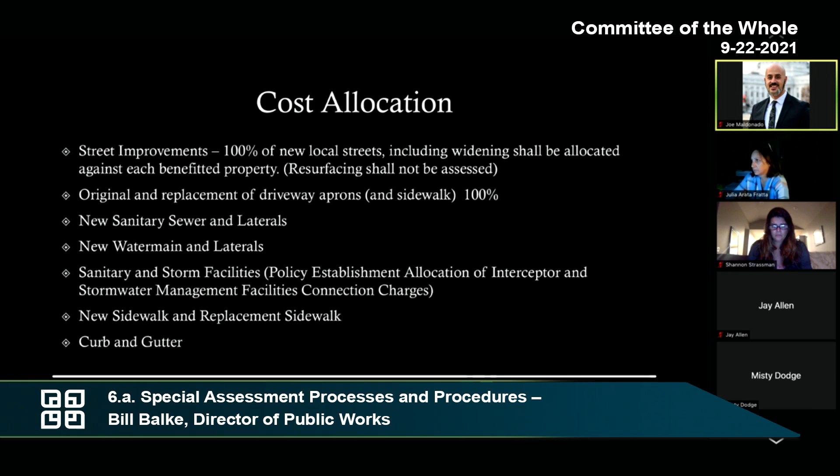Curb and gutter is another area that we would assess for, and it's all laid out in the policy. There's a lot of detail as to how much of the curb and gutter is assessed, the percentages, the length, et cetera.

A front foot method is typically what we would use for things like curb and gutter and sidewalk. You take the total project cost for those elements, divide it by the number of feet in the frontage for each property, and you get assessed a per-foot cost based upon the lot frontage you have in front of your lot.

As you can see, some lots are smaller than others, so it's not exactly equal. If you have a longer lot, it would be more equitable — instead of fair — that larger lots have a larger assessment.

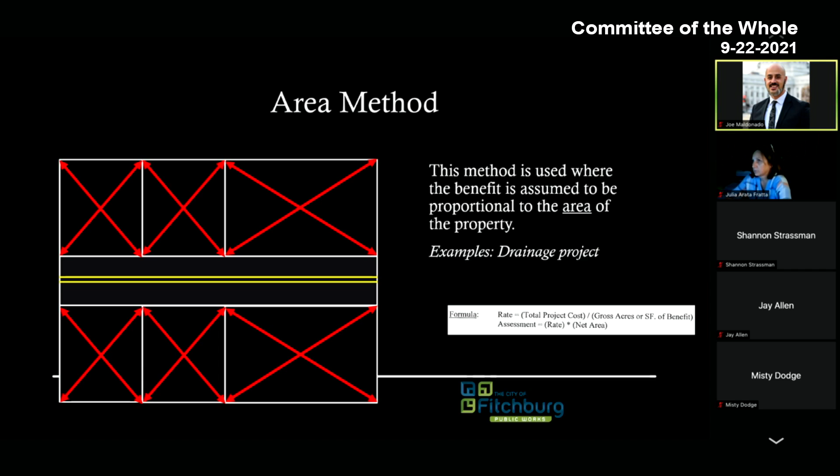Area methods are similar to the per-foot method. For instance, you take a lot area and divide the project cost by that area. We would use this for something like a drainage issue, where there's an area that drains into a specific development or stormwater project, and we divide that cost up by the area of contribution to the stormwater.

Lots or connection methods are similar to the area method, but everybody is assessed equally. It's the most fair of the methods, but smaller lots are paying just as much as the biggest lot that's there, and sometimes that's not always equitable. There's no good right way or wrong way to do this — it's how you look at it. If you have a tiny lot or a tiny frontage, you're paying just as much as somebody with a big frontage or a big lot.

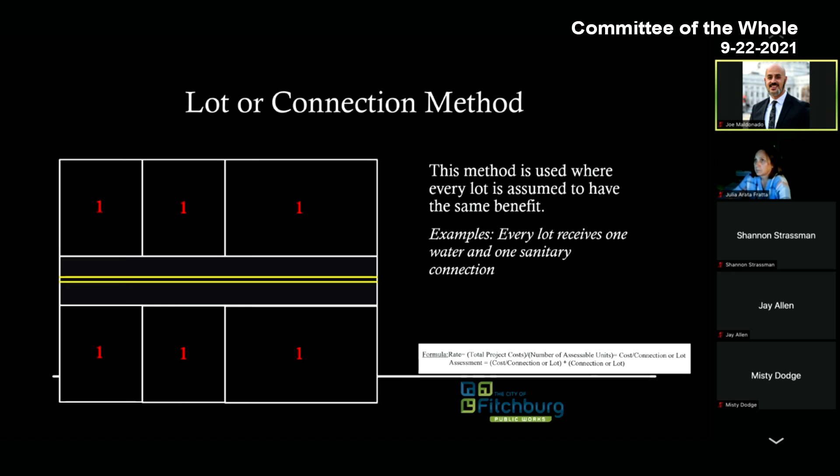Benefit zones are similar to the lot area method, where if we have a pond at the end of a street, everybody would be contributing their fair share based upon the areas that they have closer to that improvement.

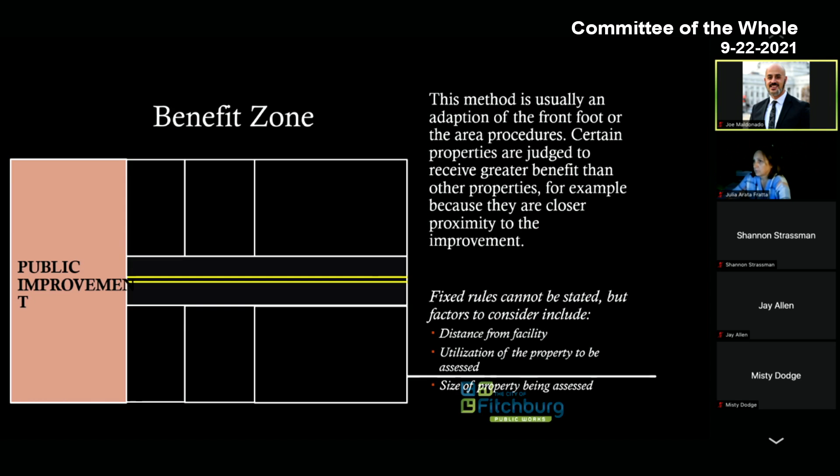In our assessment policy, we have preferred methods for assessments. For example, for curb and gutter, sidewalks, alleys, and storm sewer, we would want to use the per-foot or area method. There's a preference from most common to least common method that we use when we determine what kind of assessments to implement.

Communication outreach is something I wanted to touch on. We do try to get the project or special assessment notices out to properties anytime there's an assessment contemplated within the 10-year capital improvement plan.

For instance, if we know 7, 8, or 9 years out we're going to be installing a water main on a project, and part of the benefit is recovered by special assessments, they'll get a notice -- essentially a letter saying we've got a project in the capital improvement plan and there's a pending assessment for it. They're invited to come to the public hearing for the capital improvement plan and speak their mind.

I think that's something we can probably do better outreach on, just to explain the projects a little better so people have an understanding of what an assessment is. Maybe some more information in that CIP process to make sure people understand what the project is and why it's needed. It'll just involve a little more staff time up front to make sure we have letters explaining the key points of what's coming and why it's important.

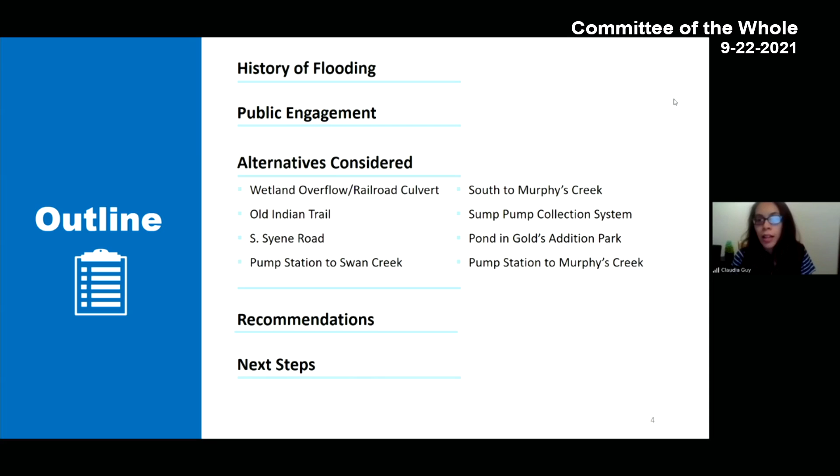Just a quick outline of what we're going to be talking about today. We're going to start with a history of flooding in this neighborhood. We're going to talk about public engagement and input that we've received from the public on this project. Then I'm going to turn it over to Anne Marie Kirsch to go over the alternatives that we considered, as well as the cost and benefits that we're expecting to see from those alternatives. And then we're going to move on to recommendations and next steps.

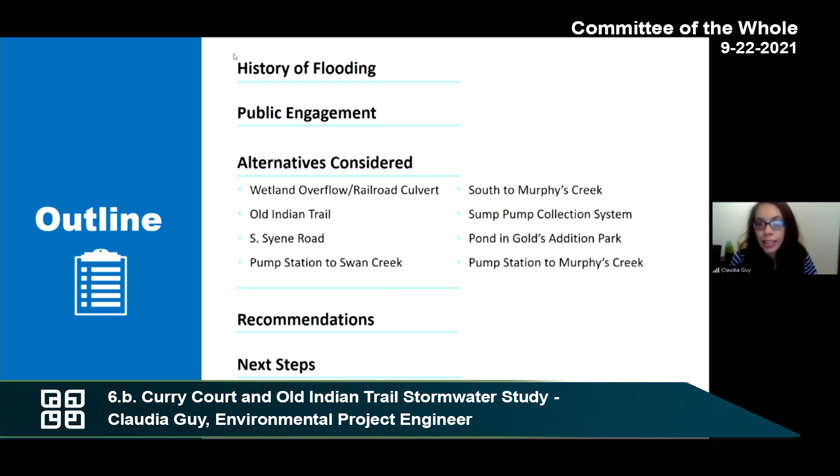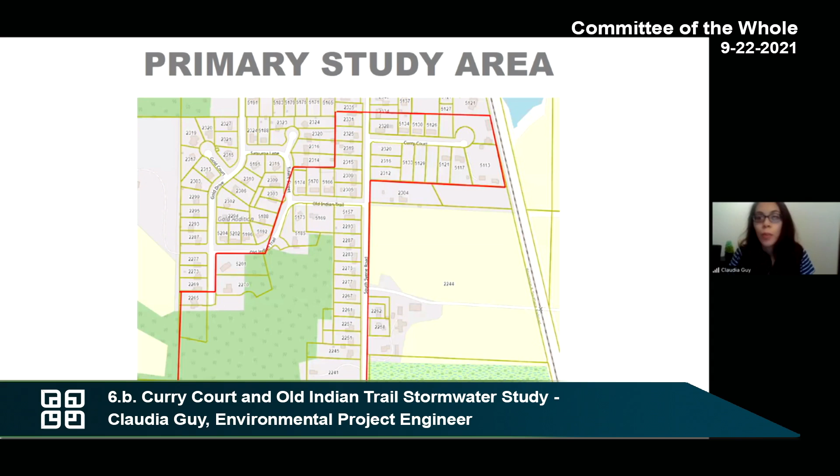So just to start with some history of the flooding in this area. The primary study area included Curry Court, which is on the east side of Fitchburg, south of Irish Lane, along South Syene Road there. So this included Curry Court and Old Indian Trail, as well as Gold's Addition Park. This was really the area that we were trying to understand what the current problems are and what could feasibly be done to improve the identified problems.

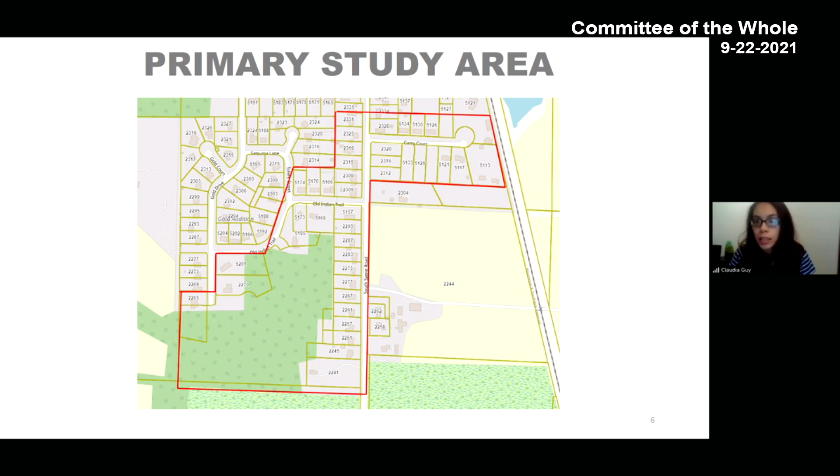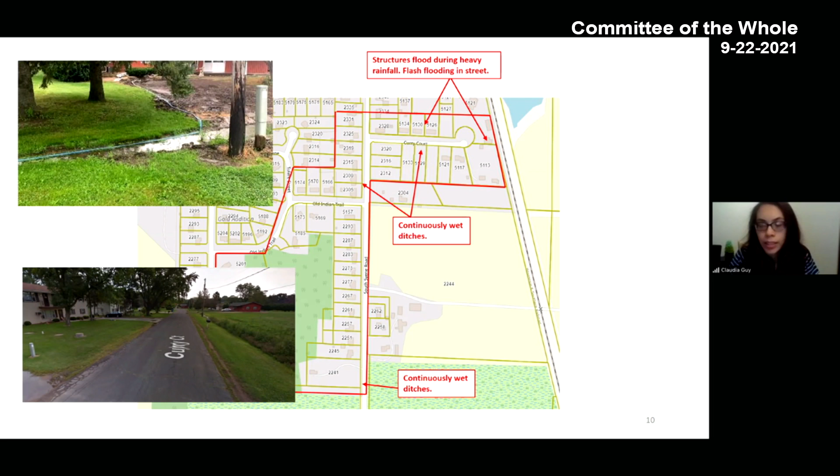Another thing that we heard is areas that have continuously wet ditches, and here are some photographs of what that looks like - just ditches that are constantly wet. In addition, there's a culvert that goes underneath Old Indian Trail, and it doesn't drain. So there's localized ponding on either end of the culvert, which historically drained to the south, but that drainage route has since been blocked off - it's just been filled in by previous owners who lived in that area.

And this is what that looks like. You can see that there is this kind of lime green color - that's actually water, and it's that color because there's algae. That is an indication that water has been standing there for a very long time. Typically, if you have water that goes to an area and then flows away pretty quickly, that water will look relatively clear, versus if it really is ponding there for a very long time, you will see algae like this start to form.

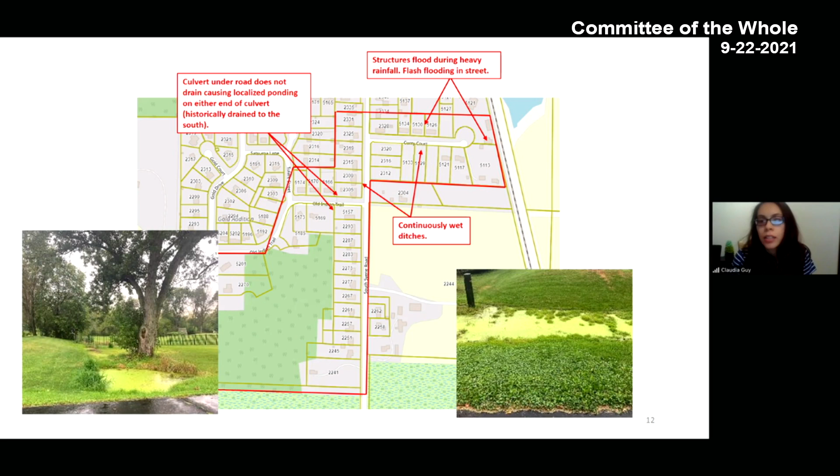Also, we heard one resident who was dealing with flooding in their backyard due to lack of positive drainage away from their yard. And flooding in the park as well due to flat ditches and areas, high groundwater, and also sedimentation within those ditches. It's become a problem.

This is an area that the park staff maintained in the past, but because it's so wet, it hasn't been possible to get mowers back there, at least for the last few years, because the mowers get stuck or would get stuck if we tried.

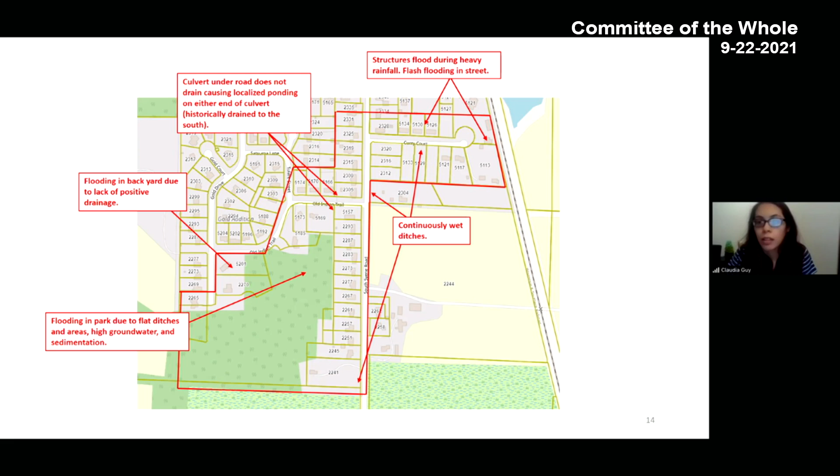And here's just a photograph of what that looks like. You can see the green algae again, indicating that this water really is ponding there and not moving very quickly.

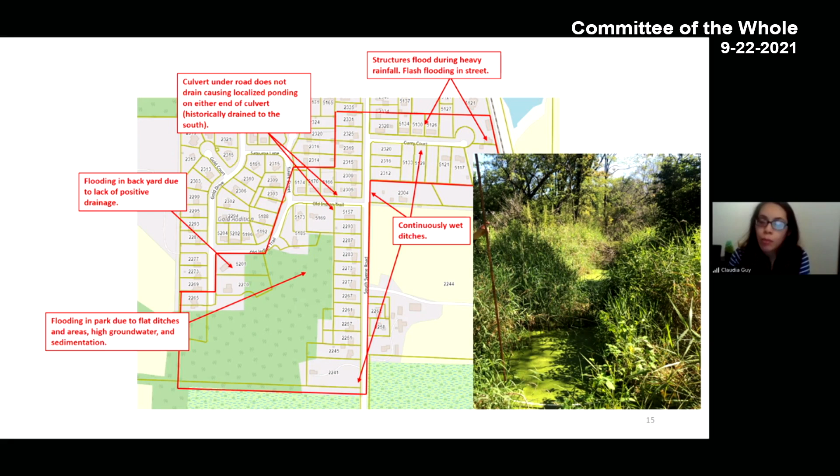So in terms of public engagement, we had a public information meeting earlier this year to introduce the project and to also solicit input regarding existing problems as well as input regarding potential solutions. We wanted to make sure that we had a clear understanding of all of the problems here, as well as asking residents to provide input on if they had ideas for solutions.

After that project, we proceeded to pick alternatives and then move forward with the analysis of those alternatives. And then we had public information meeting number 2 to review the study results with residents. The pumping station wasn't included at that time because that was a change order since then.

Based on that public information meeting, we heard a lot of negative feedback on the sump pump collection system alternative. So we sent another survey following that meeting to get additional input from residents who would be impacted by that, just to see if the people who came to the meeting were representative of the general consensus of the people who lived in that area.

Anne Marie will talk about the results of that in more detail later. And then of course, today we're coming to the committee of the whole to review the study results and solicit feedback on next steps.

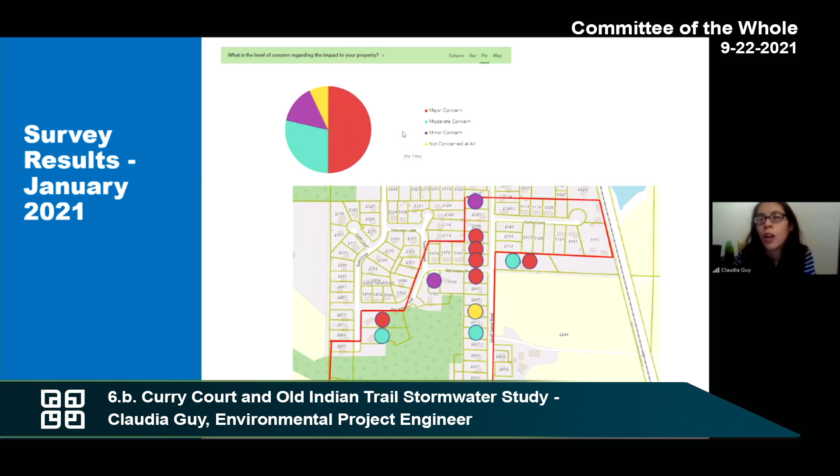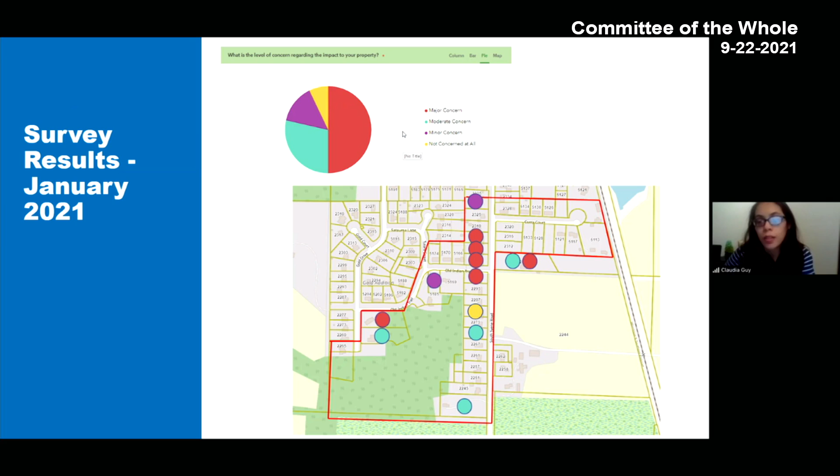About half said it was a major concern, a quarter said moderate, and the rest said minor or not at all. I thought it would be interesting to see where those people were located. One thing I noticed is that it seemed to correlate - the people who said they had a major concern seemed to be the folks who have sump pumps that run continuously. So at least in my mind, one of the biggest problems is sump pumps that run continuously, and you would presume soggy ditches that result from that.

We also asked folks for input on what they thought the best solution would be for flooding problems in the area. The most common response was that folks really didn't know or have insight into what might be a solution.

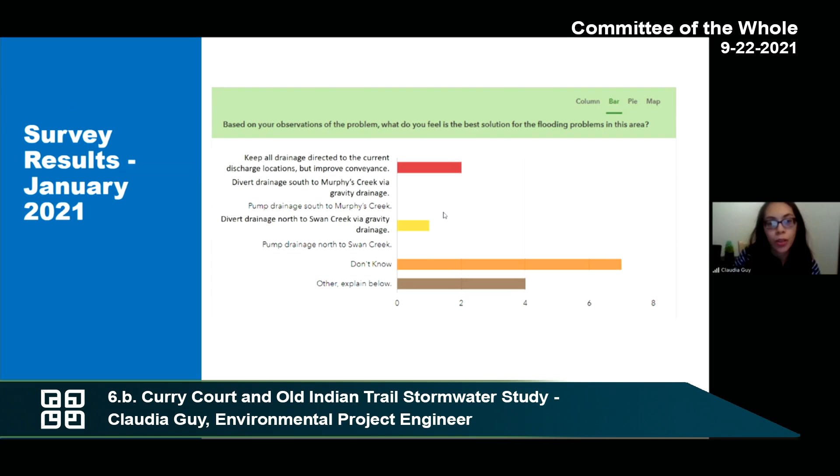2 people said keep all the drainage directed to the current locations, but improve conveyance. 1 person said divert drainage north to Swan Creek via gravity drainage. Then 4 people had additional responses: one said gravity drainage but they were unfamiliar with creeks, another said dredge ditching in the park to drain to the south from Old Indian Trail, hopefully alleviating some burden from Curry Court. Another said consider running sanitary sewer to the area, and another simply said not enough space to explain.

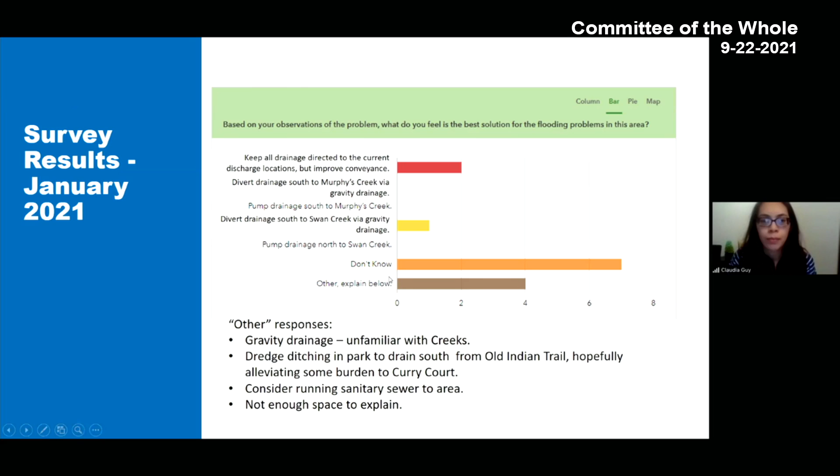In addition to sending out that survey, as part of public information meeting number 1, we asked people to feel free to reach out if they had more insights that they wanted to share. So we did receive input from residents via email, phone calls, and on-site meetings with residents throughout the neighborhood, if they reached out to us.

That input included ideas regarding gravity drainage along South Sayin Road, ideas regarding gravity drainage along the railroad corridor through Mark Jones's property, ideas regarding drainage through the park, and assistance reaching out to property owners east of the railroad tracks regarding potential ditch work.

We also had meetings and input from stakeholders who we may need easements from in order to implement some of these alternatives, to gauge their level of interest in working with the city for a potential easement. Those folks included the property owner south of Old Indian Trail, the property owner at the end of Curry Court, and the property owner east of the railroad tracks.

More recently, we sent out that sump pump collection survey, which again Ann-Marie will talk about in more detail later.

With that, I'm going to hand it over to Ann-Marie to discuss modeling, and I'll stop sharing my screen.

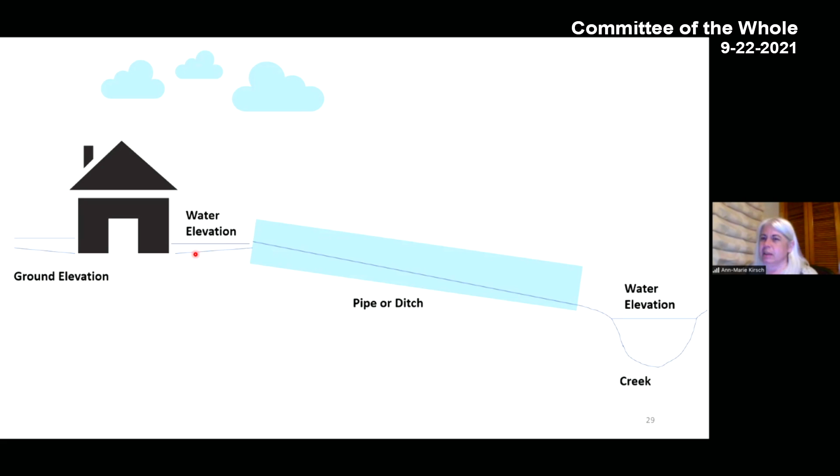In this area, we have a lot of homes with rural section roadways without curb and gutter or storm sewer, so all the water flows through ditches or culvert pipes. One issue is that where the homes are, the water tends to spread out because the topography is so flat. Unlike behind a roadway culvert or a dam or detention pond, we can't effectively stack that water up to get it through more quickly.

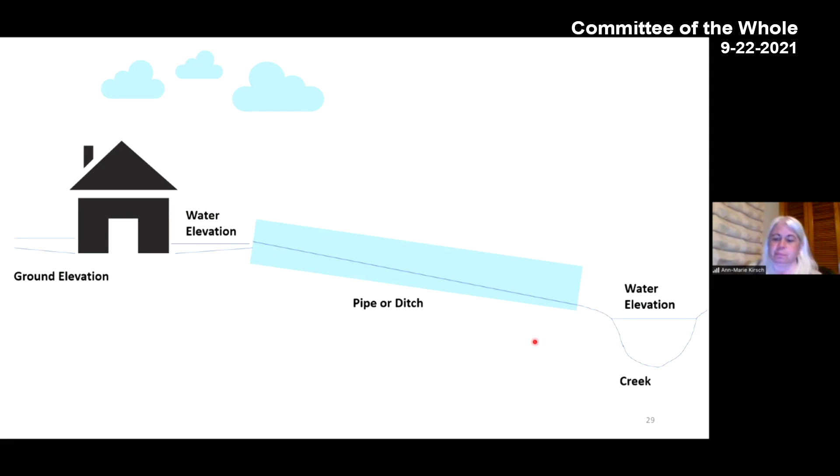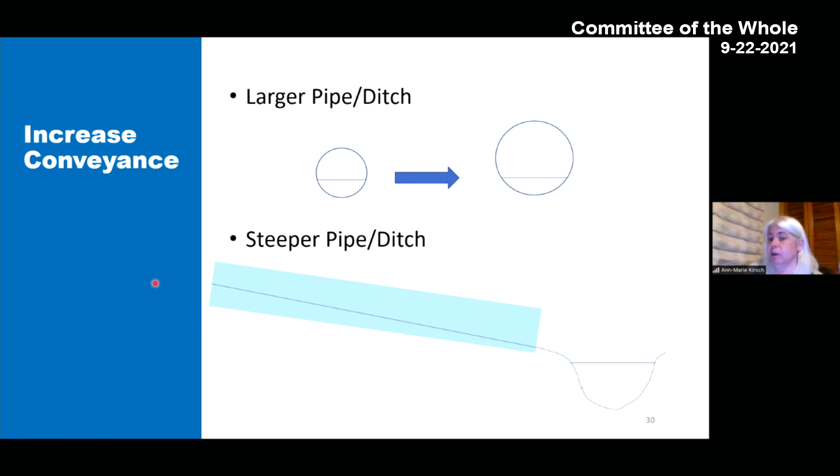We're also controlled by the creeks at the other end, either Swan Creek or Murphy's Creek, which are fixed locations we can't move. Sometimes people say, what can we do to increase the conveyance? Let's put in a larger pipe or ditch. But because we have such a limited ability to stack up the water, even a bigger pipe won't get a lot more water through. We'd also think about a steeper pipe or ditch, but the grades are really limited. We can't dig down lower because of the creeks at one end, and we can't raise the houses at the other end because those are fixed elevations.

We also hear a lot about detention ponds, and we see them all over the city, especially with newer development. The thought behind a pond is you've got water running off the watershed. In agricultural or natural conditions, there's not as much water running off, and it just flows naturally downstream, maybe to a creek or a lake. Before development, everything runs at its natural rate.

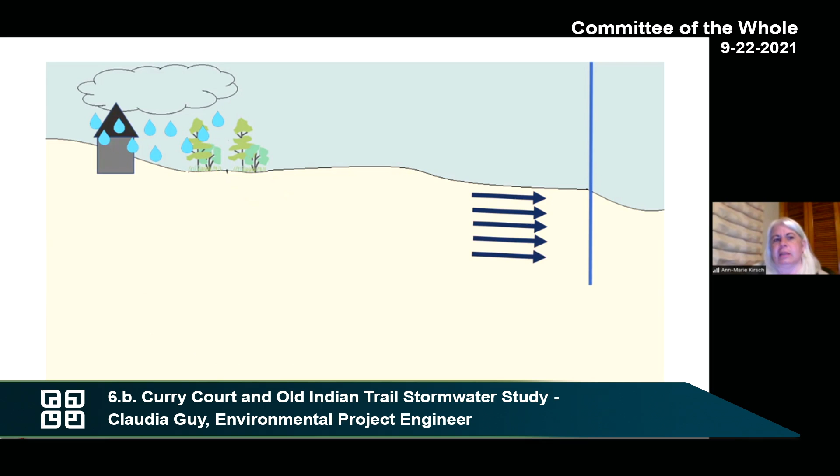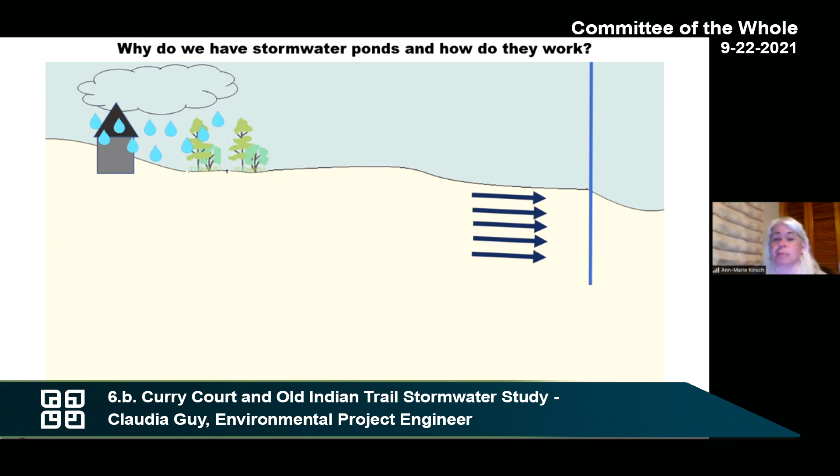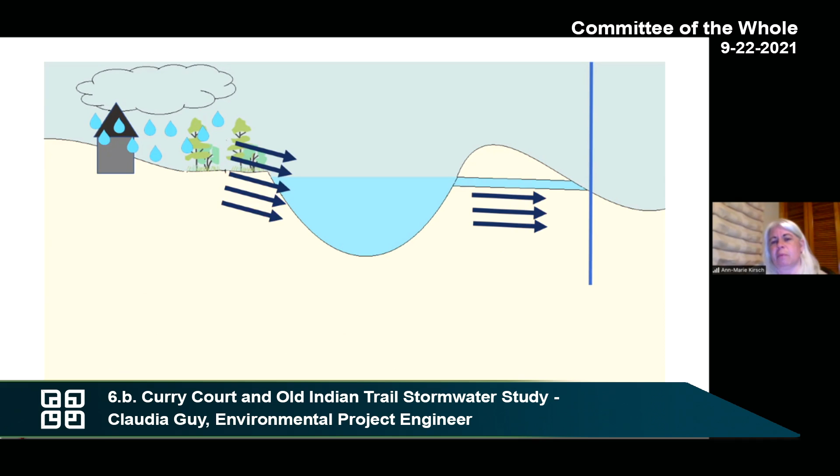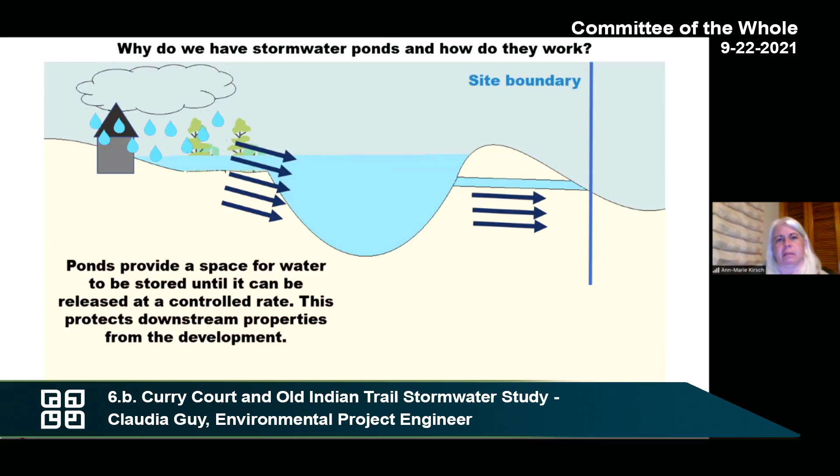The average ditch slope is around 0.6%, which is very flat — 0.5% is really the flattest we would ever choose to design something. Some areas are slightly flatter and some slightly steeper than that average.

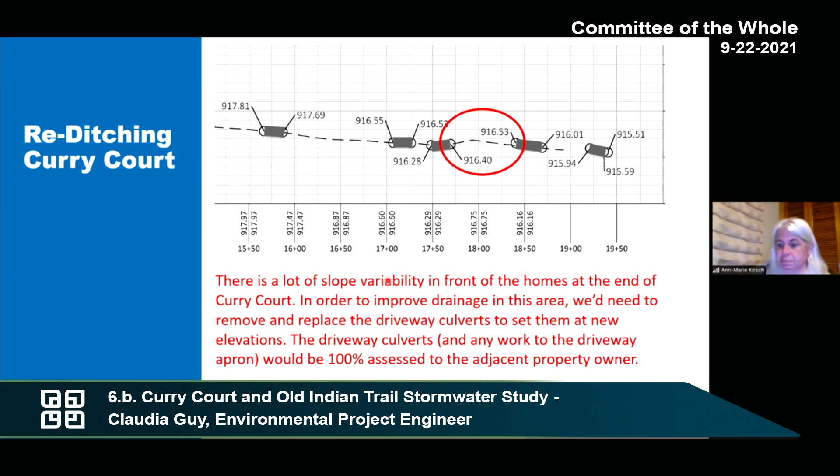Bill was just talking about assessments earlier in the day, and because this is a benefit to the property owners, the driveway culvert replacements or resetting would likely be assessed 100% to the adjacent property owners. Because the ditch itself is within the city right of way, the city would have responsibility for maintenance in terms of potential future dredging or sediment removal, but the property owner would be responsible for the driveway culvert itself.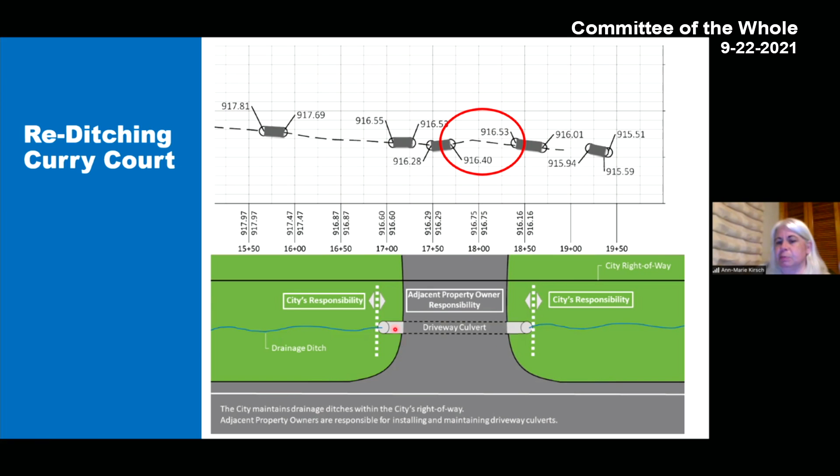So this would provide marginal improvements, more for everyday events or the sump pump collection, keeping the water moving rather than pooling in low-lying areas. This area sees a lot of water from sump pump discharge, so it's still going to see a supply of water that can impact the ditches and keep them wet, especially with poor drainage conditions in the soils.

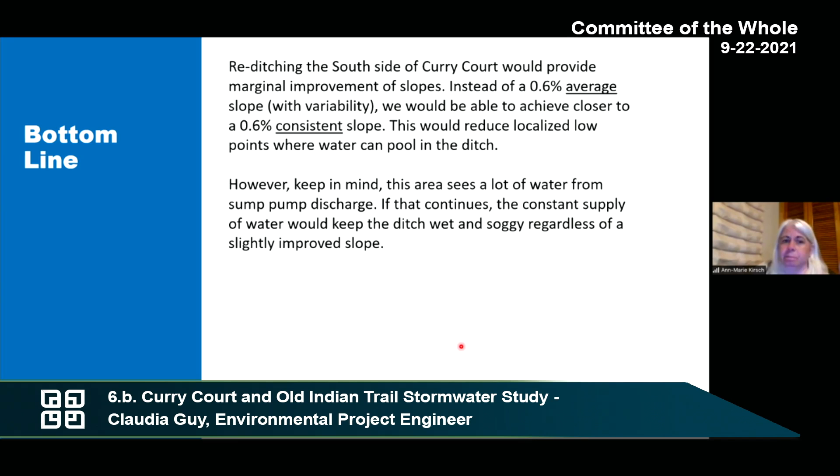The other thing we've talked about is a new ditch at the end of Curry Court. Right now, the water flows under the driveway at the east end of Curry Court. There's a little open area here, and then a second culvert goes underneath this driveway and parking area before it discharges into the existing culvert, the 3.5 foot by 3 foot box culvert under the railroad.

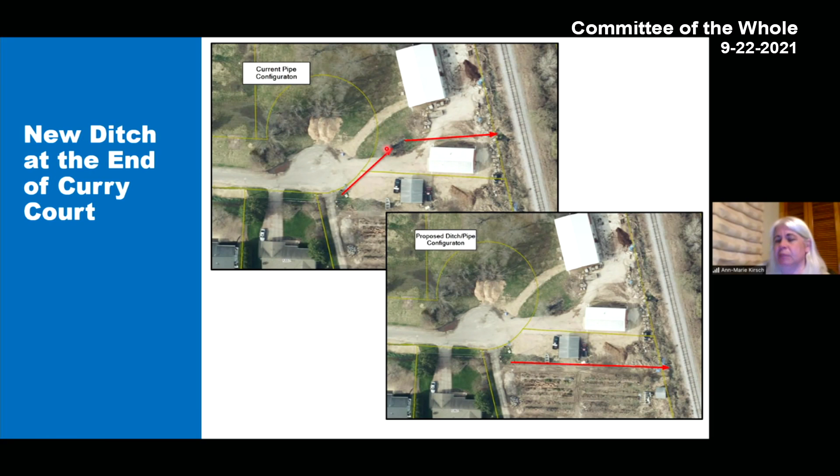One thing we were talking about doing is possibly putting in a ditch and obtaining an easement from the property owner for a ditch or conveyance system south of the sheds. The reason we look at doing that is while these pipes are currently in pretty decent condition structurally and don't seem to be clogged, the city doesn't have a maintenance easement or stormwater easement for that location. So if things go poorly, the city doesn't have the ability to go in and fix or maintain it. However, if they secure the easement and relocate where the drainage goes, ultimately still draining underneath the railroad, there may be a benefit to both the property owners and the city.

So the first major improvement we looked at was also something that Claudia brought up, that people talked about in the public information meeting: keeping the water where it's going, but just making it better. This one looks at improving the conveyance that currently goes from Curry Court northeast towards Swan Creek.

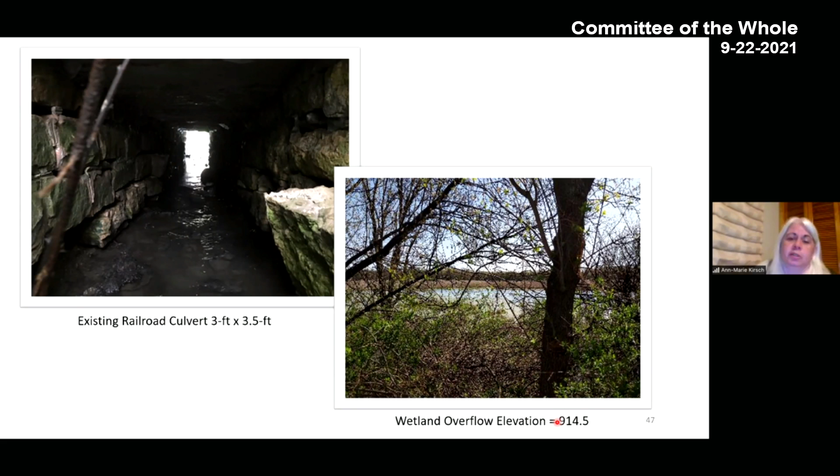Why are my slides getting out?

So what the bottom line is, we looked at the modeling and there was literally no change in flooding extents or duration at the peak storm time, at the 2-hour point.

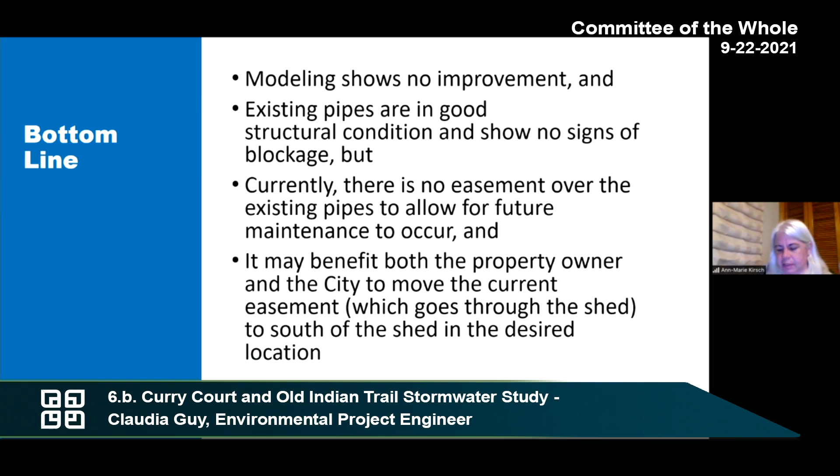Am I going backwards? Yes, I am, sorry.

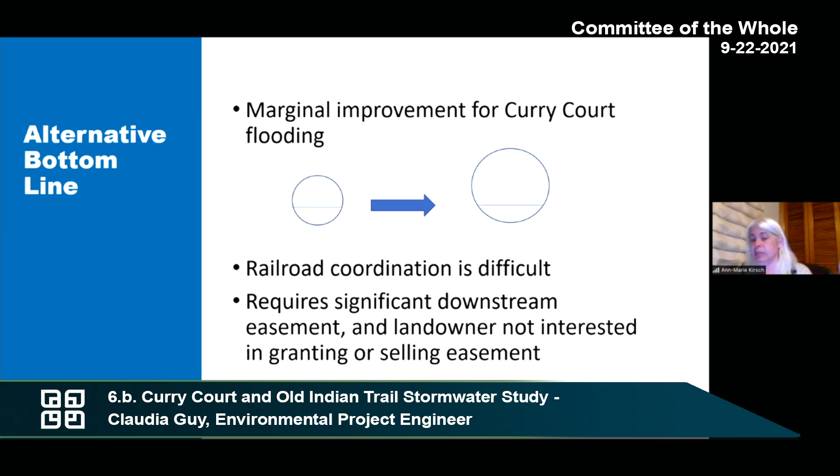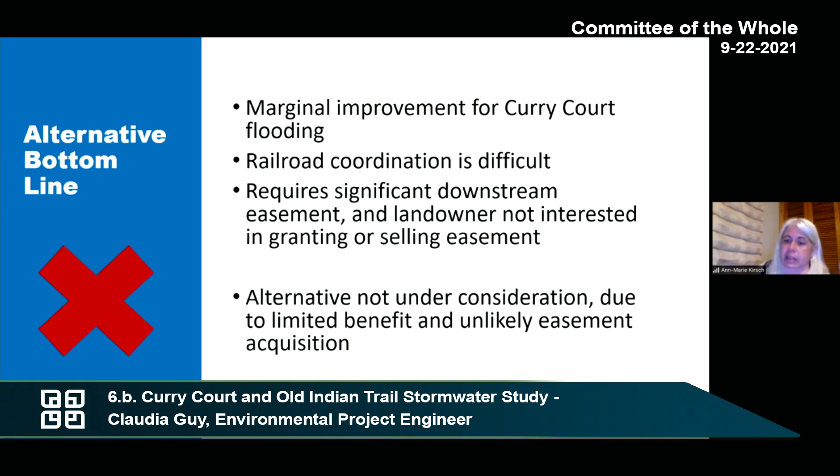So marginal improvement for Curry Court flooding. Again, this is the situation we talked about earlier, where even if you put a bigger structure in, we can't stack the water up higher behind it, so we're not getting much more water through. One of the issues is that working with a railroad can be very difficult. They own their own facilities and don't like disruptions to their service, so installing a secondary culvert would be difficult for the city. Also, this option would require significant downstream easement, and at this point the landowner has not expressed interest in either granting or selling an easement for any improvements across their property. So at this point, this alternative is not under consideration because there's not really any benefit, and it's unlikely the easement would be granted.

So the next project we looked at were the localized improvements at Old Indian Trail. This is what Claudia talked about, with the ponding water on either side of Old Indian Trail. This alternative considers adding a pipe along an easement. We've opened conversations with the impacted property owner, who recently purchased this property, and we're also looking at cleaning out the ditches that go through Golds Park, stabilizing the ditches, removing the sediment, and doing all the permitting work needed to get that done through a wetland area. Towards the end of the park, the ditch seems to flow pretty freely, and it's pretty stable and clear of debris and sediment.

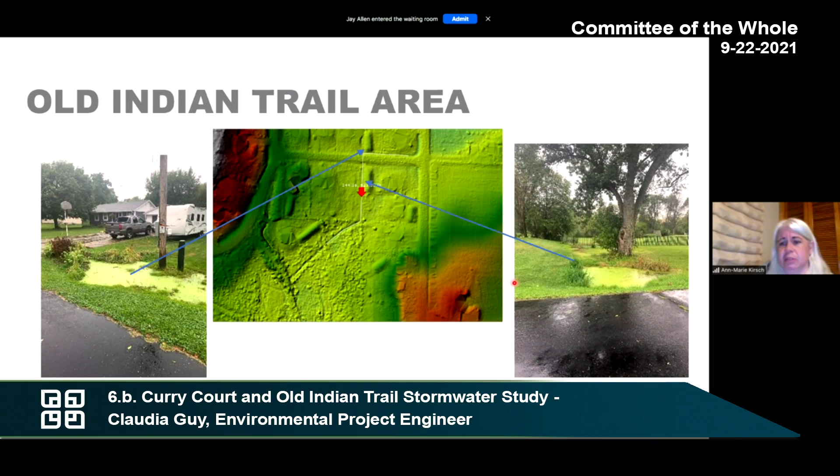So this is an aerial photo showing elevations. You can kind of see where this ditch is, and this is the high point here. You can also see these are the photos Claudia showed before, showing the stagnating water with the blue-green algae. So the bottom line with this alternative is that it eliminates standing water at Old Indian Trail on both sides of the culvert. It also helps flooding for about 4 immediate property owners in the area. The benefit is that it's relatively inexpensive and relies on gravity drainage.

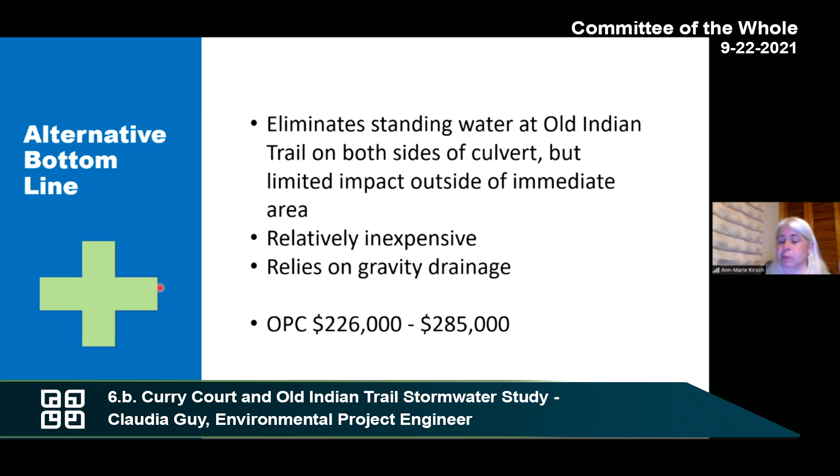Right now, the opinion of probable cost ranges from about $226,000 to $285,000 for these improvements, exclusive of potential costs for easements. So at this point, we're recommending that the city move forward with this part of the project.

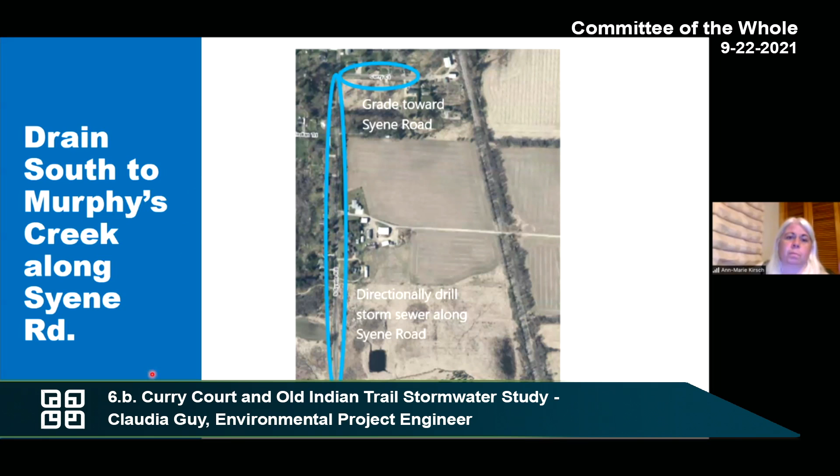Also discussed during our first public information meeting, and through separate email correspondence with Claudia, was the idea of providing gravity drainage along South Syene Road all the way to Murphy's Creek. The idea would be that we could lower the elevation here, pick up the water, and construct a 36-inch pipe all the way to Murphy's Creek. To make this really work, we would back-grade the drainage along Curry Court to go back west towards Syene Road. Those are the two primary components of this project.

So what are the challenges with this project? The biggest one is that Syene Road, south of Curry Court, has a pretty good-sized hill. Here's a photo, this is a profile, imagining you are standing on the west side of Syene Road looking at the hill. At the north end here is Curry Court, and this would be a culvert pipe that would pick up the water. This blue line is the roadway profile, not the ground profile. There would be a ditch where this culvert would pick the water up, and it's about a 36-inch pipe at only about 0.5% grade.

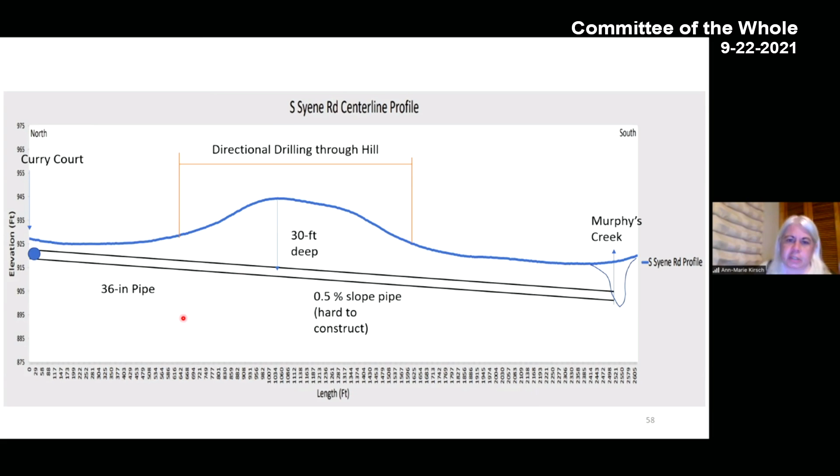At this point, at the top of the hill near Mr. Jones's property, the hill is about 30 feet deep. So there's no way that part of the pipe could be open cut, because the houses are adjacent to the roadway. This section of pipe would require directional drilling at 0.5%, which is very difficult to construct. The pipe continues until it intersects Murphy's Creek, where it would discharge. These remaining, shallower pieces of pipe could be open cut for construction. Bottom line, this is a very costly option and a very disruptive construction process. Right now the roadway is already under construction with water main improvements, and this would be a very similar type of project, with that open cut.

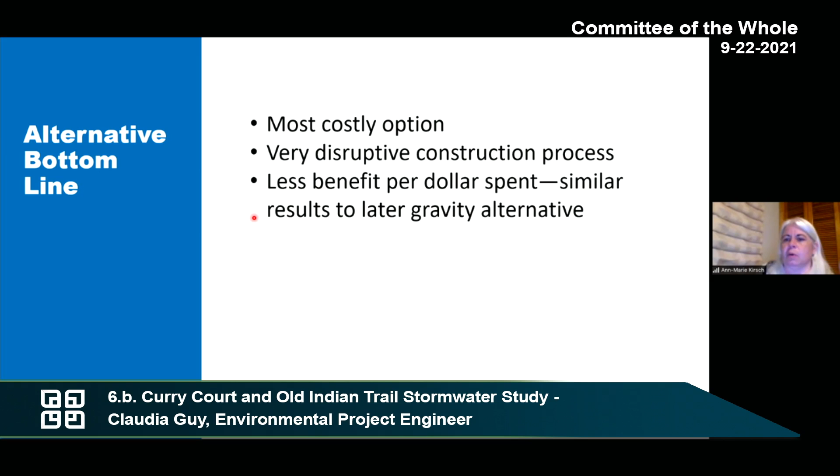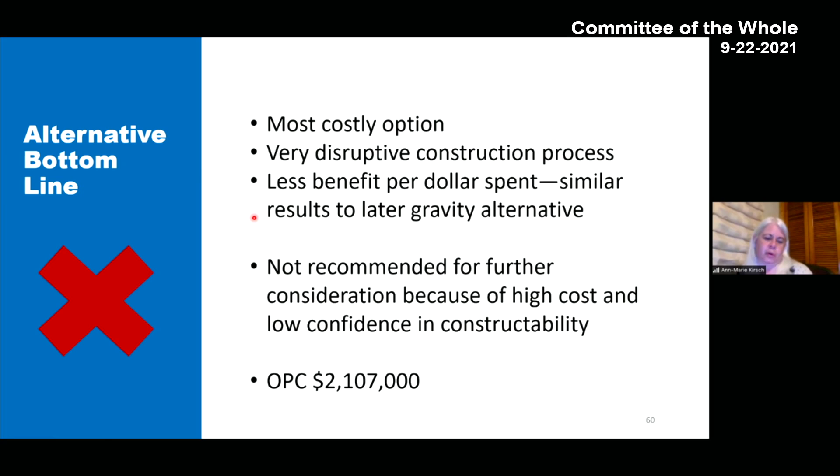There would need to be areas for pits for the directional drilling area. One of the challenges is that it's very difficult to get the materials for directional drilling right now, and it's very expensive. We're going to talk about a second gravity alternative that goes closer to the railroad tracks, and even there it's not nearly as much benefit per dollar spent. So at this point, we're not recommending it, because this project is estimated to be about $2.1 million, and it has not only a high cost but a lower confidence in constructability because of that directional drilling and the low slope on the pipe.

So this is the second alternative, where we looked at gravity drainage going south towards Murphy's Creek. The difference here is that the water would be picked up and still drained to the east along Curry Court, and would be conveyed with a combination of ditches and pipes along the railroad through Mr. Jones' property, to the point where it would freely discharge and then drain south to Murphy's Creek. The section that would be piped, again, would also be a 36-inch pipe.

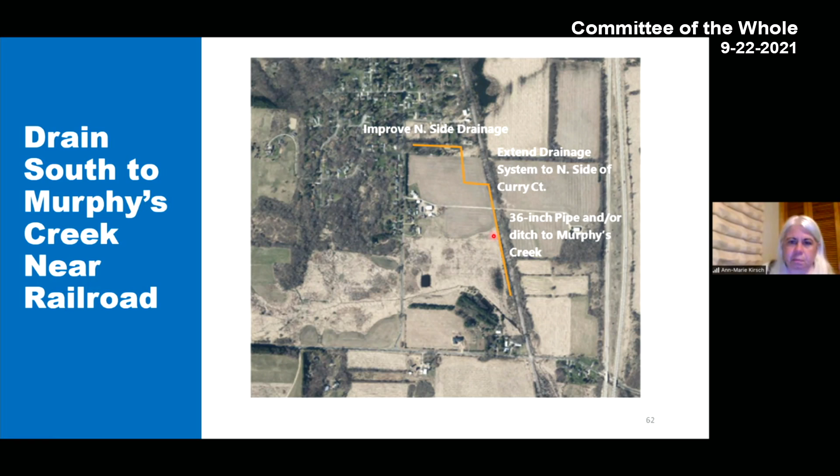The bottom line for this alternative: first, we have a landowner who has approached the city and is willing to talk regarding easement acquisition. It allows for easier construction since it's in an open field as opposed to being underneath a roadway, and there's some flexibility based on final survey and design as to how much is pipe or how much is ditch. This has a significantly lower project construction cost—still substantial, but much lower than the directional drilling option, at about $670,000 to $720,000. At this point, we're recommending further consideration, but definitely with input from Common Council and others.

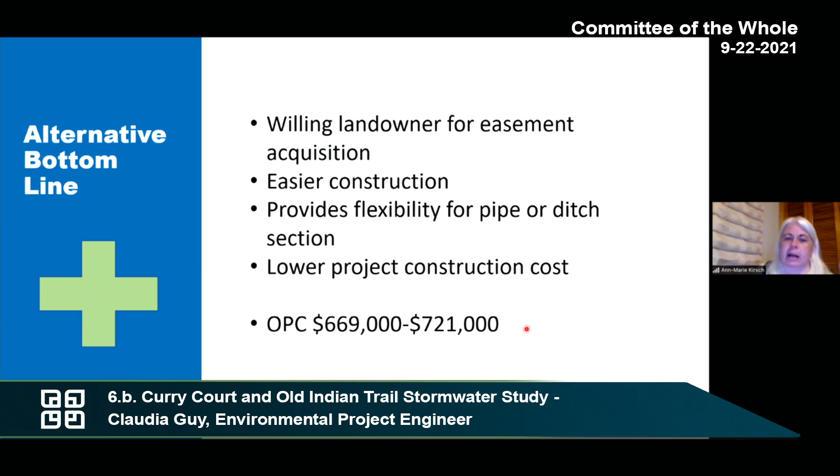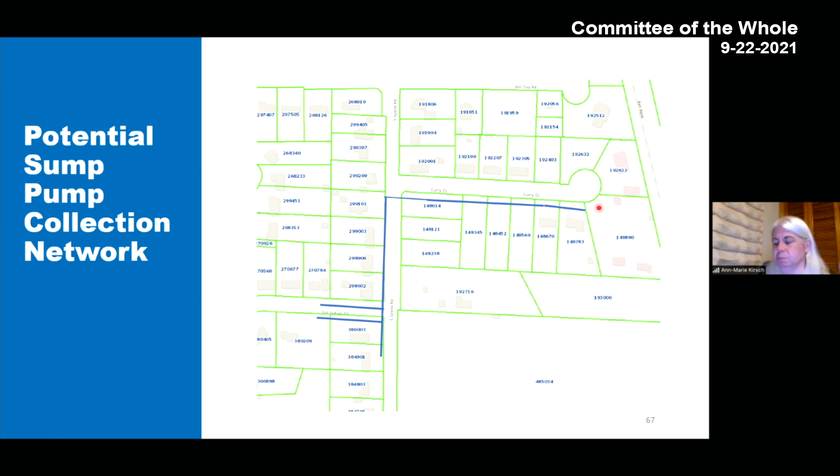Now we're going to talk a little more about the sump pump drainage idea. This isn't typical here in Wisconsin, but it's very common in other parts of the upper Midwest affected by glacial geology, just like the city of Fitchburg. After hearing back from people at the public information meeting about the fact that they either don't have sump pumps or they don't run, this is what we were looking at: a potential collection network running on the east side of Old Indian Trail, north along Syene Road, and then along Curry Court, discharging to its current discharge point towards the railroad culvert.

So what does this look like? It's really almost like a miniature storm sewer system located within the city right-of-way, or a stormwater maintenance easement, depending on the right-of-way location. The city would be responsible for the actual collection system—the PVC in the ditches, collecting it—but the homeowner would be responsible for the private system that connects to the public system.

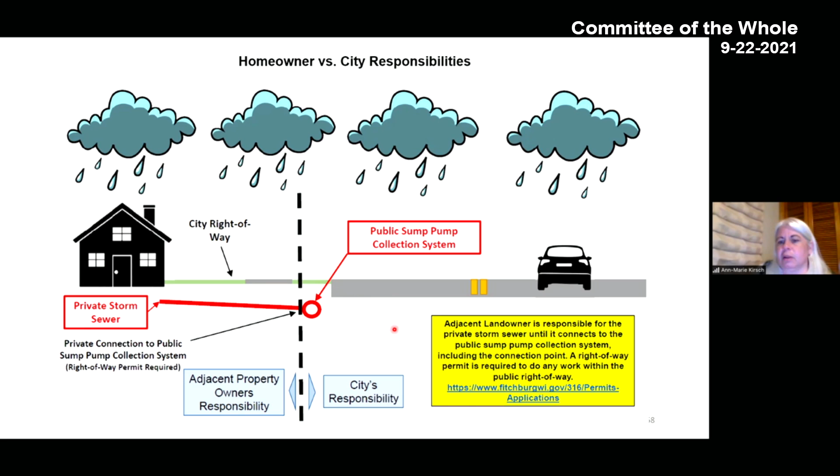Claudia's put together a little more information, but when we first started looking at this, we thought this is good because it's constructible. There was enough grade to get this constructed to protect affected landowners. It could really help reduce soggy ditches by giving an actual pipe for the water to flow in, and it would help prevent recirculation, where one person pumps water out of their basement only to have it go to somebody else's house and wind up in their basement. The thing about this is that it's a system specifically targeted for groundwater-influenced flooding—seeping into people's basements—not meant as a fix for surface water flooding, the kind you see during big storm events, like when Curry Court was underwater. This is a less expensive alternative.

Again, it's looking at something a little bit differently. The opinions of probable cost are a little under $200,000. So originally we said this is something that the city should think about.

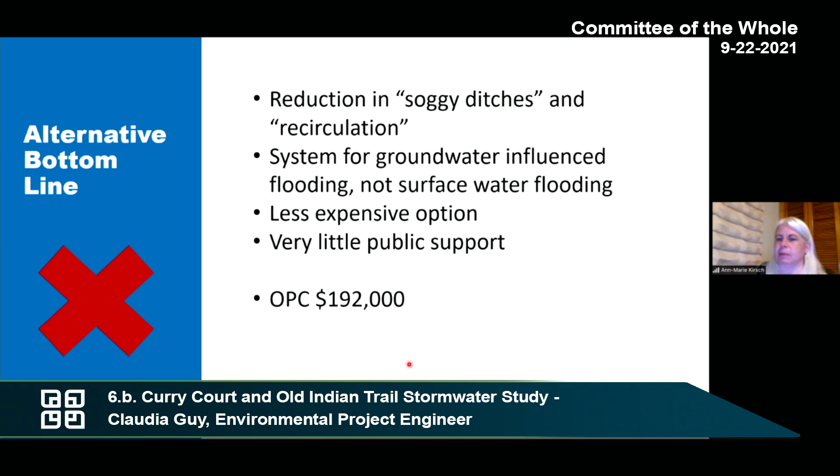Until we attended the second public information meeting, and there was very little public support and very vocal lack of public support. In response to that, Claudia sent out a survey to homeowners in the area. Only one person surveyed suggested they would be interested in hooking up to a sump pump collection system. If only one person is interested, it's not really a collection system, and it no longer is a viable option.

Again, this is adding on to what we talked about earlier about stormwater detention ponds, and this idea of a pond in Gold's Addition Park has been brought up several times.

So the bottom line is that the whole idea behind putting a detention pond in Gold's Park, like we talked about earlier, is that it's downstream of where the flooding was occurring. So there's not really a flood control benefit to either Curry Court or Old Indian Trail for surface flooding. There's also a significant amount of expense for construction, and potential liability, especially for a pond in an area that's out of sight, maybe out of mind, not frequently traveled. So at this point, this is not something that's being promoted for recommendation.

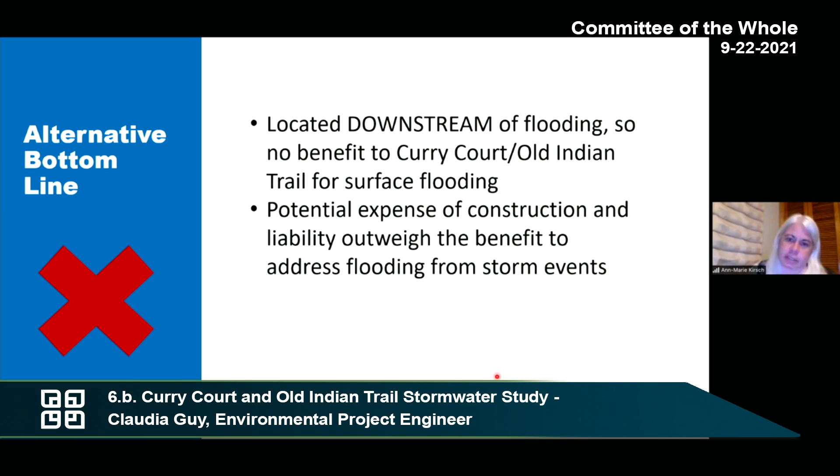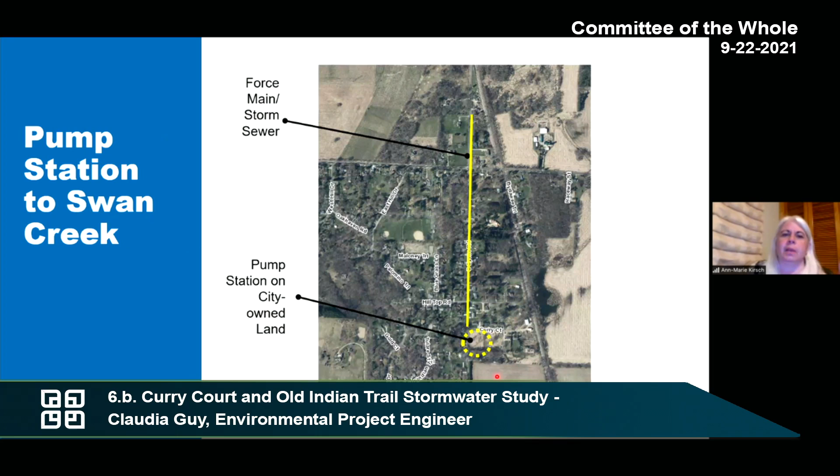So now this is something new that we looked at since our second public meeting - a stormwater pumping station located at Curry Park. There are two separate alternatives, but they both behave very similarly in how this would work. The idea is that the city owns 4 lots at the southeast corner of Curry Court and South Syene Road, currently designated as park, but a pumping station could be constructed here for stormwater conveyance.

In this case, a force main - the pumps would force water uphill through a pipe under pressure to the top of the hill, and then the second half would flow downhill towards the railroad, and eventually into Swan Creek. We'll talk about this a little bit in a minute.

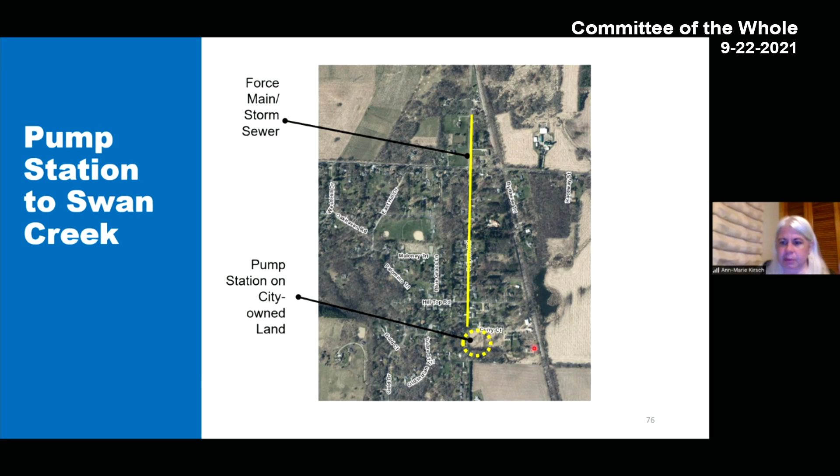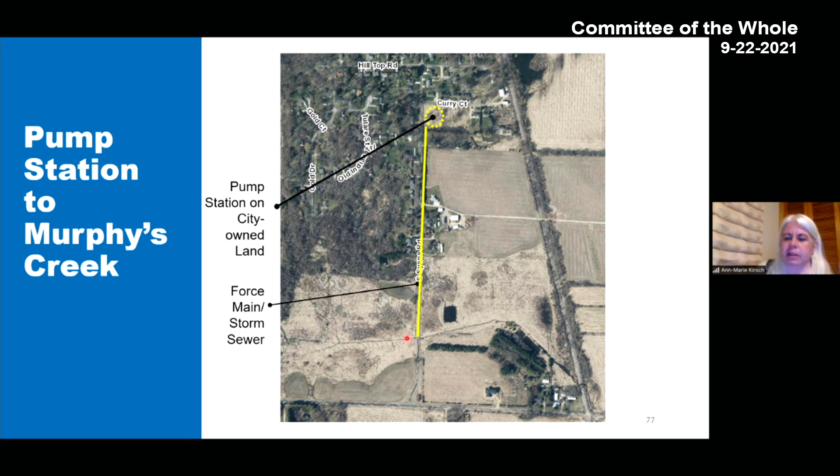So what are the bottom lines? The bottom line is that the city owns the land for the pump station construction.

Because the force main and the gravity sewer would be closer to the surface of the roadway, there'd be less interruption to Syene Road. This could be open cut.

Pumping to the Murphy's Creek discharge location is more feasible because there's no easement required to reach the waterway. Pumping north to Swan Creek has more complications because there's not a direct shot from the roadway to the railroad culvert, so that would require coordination.

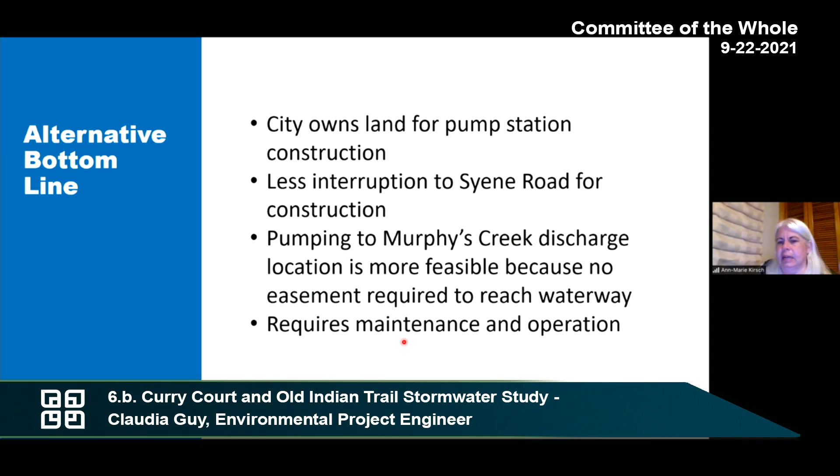The thing to remember is that these costs right now are construction capital costs, not including maintenance and operation. The biggest cost of operation would be the cost of electricity to run the pumps. Maintenance is generally smaller. The pumps are generally designed to last at least 20 years and would need to be run at least once a year to make sure they're still in good working order.

But the opinion of cost for construction is around the $2.2 million mark. And the pump station would provide pretty much an equal level of protection and improvement as the significantly less expensive gravity drainage option that goes along the railroad.

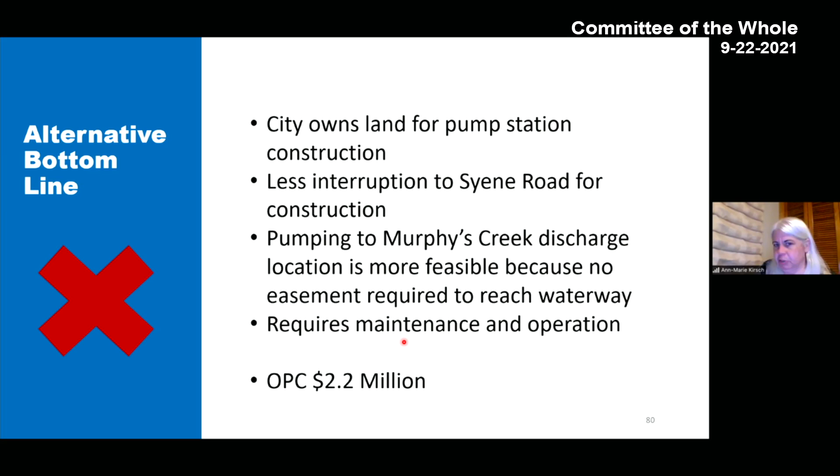So, recommendations - where do we go now? I'm going to talk a little bit about the high level of what we would recommend for the city moving forward, and Claudia is going to take over and talk about the implementation, about how to make that happen.

First, we had originally talked about the sump pump collection system, saying this could be done next year - the grades are there, it works, you could discharge to Curry Court. But we've taken that off the table because it's no longer recommended due to community feedback. This really only works when you get homeowners willing to connect to the system.

So the second primary thing that we're looking to recommend is improvements to Old Indian Trail - to install the pipe along the property line after securing an easement from the new property owner, and to clean the ditches through the park. This would really have a positive benefit for the property owners in the immediate South Syene Road, Old Indian Trail area.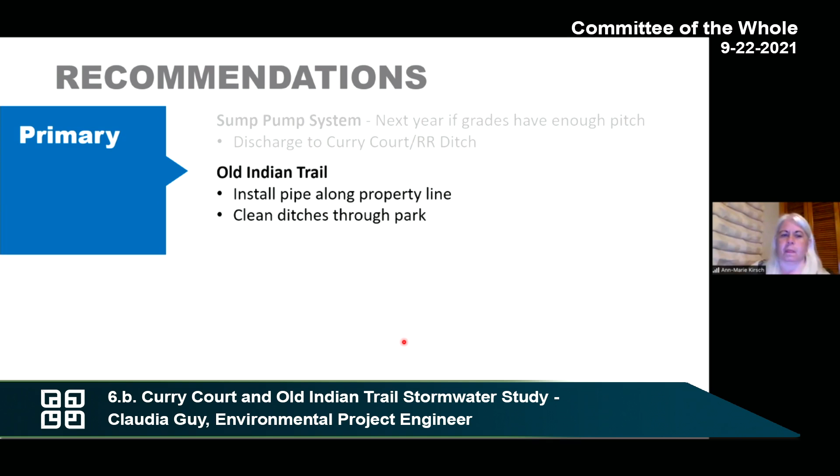Secondarily, we recommend, of all the conveyance options we've looked at, the major project to go south along the railroad. The reasons for this are that there's a willing landowner who has already been corresponding with the city and really helping come up with ideas, willing to grant easements, and significantly lower construction costs than going along South Syene Road or the pumping stations.

There is the potential for extending the drainage system to the north side of Curry Court, especially the low-lying area that can drain to the city right-of-way. This reduces the duration of flooding. It doesn't have a huge impact on peak elevation flooding, maybe a tenth of a foot, but it definitely reduces the duration of flooding. I've got some numbers on that a little bit later if you want to talk after the presentation.

So I'm going to turn this over to Claudia for next steps.

Okay, and I'll go ahead and share my screen, Anne Marie. I'm trying to figure out how to get out of mine. Stop video, no. Why can't I stop sharing my screen? Let me see if I can just steal it - found it, got it. Okay, awesome. So next steps here - I think it's full screen. Here we go.

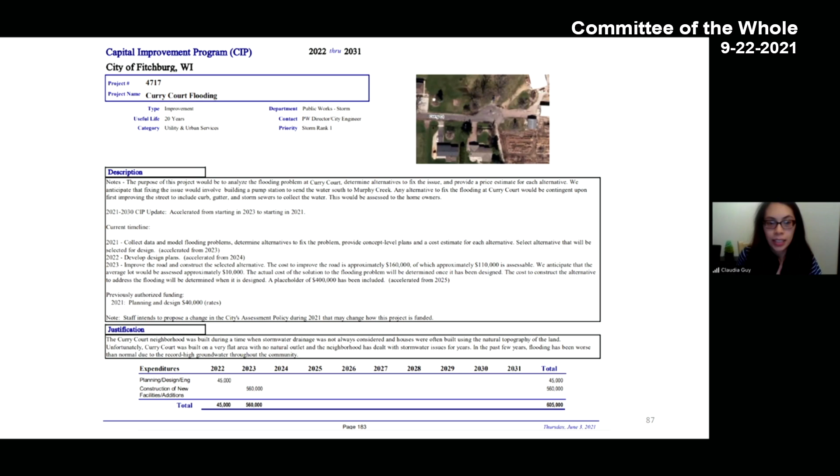So I just wanted to start by showing what we currently have in the CIP for Curry Court. In 2022, we do have $45,000 in the CIP for planning, design, and engineering costs. And then in 2023, we currently have $560,000 for the construction of new or additional facilities.

Next steps for Gold Addition Park - dredging the ditches is definitely recommended. In 2022, we're thinking we'll go ahead and design and permit for dredging the ditches within the park. We anticipate a longer permitting process because there are existing wetlands there, so that's a consideration in timing. Then either at the very end of 2022 or sometime in 2023 is when we would be looking to actually dredge those ditches.

As for Old Indian Trail, adding a culvert between Old Indian Trail and Gold Addition Park is also recommended. For the remainder of this year, we're planning to work with the property owner who lives there to determine if there's willingness to provide the city with a public stormwater easement to install and maintain a pipe in that area. If an agreement can be reached, we would certainly be able to do that in 2022. That should be a relatively easy project if we can secure that easement.

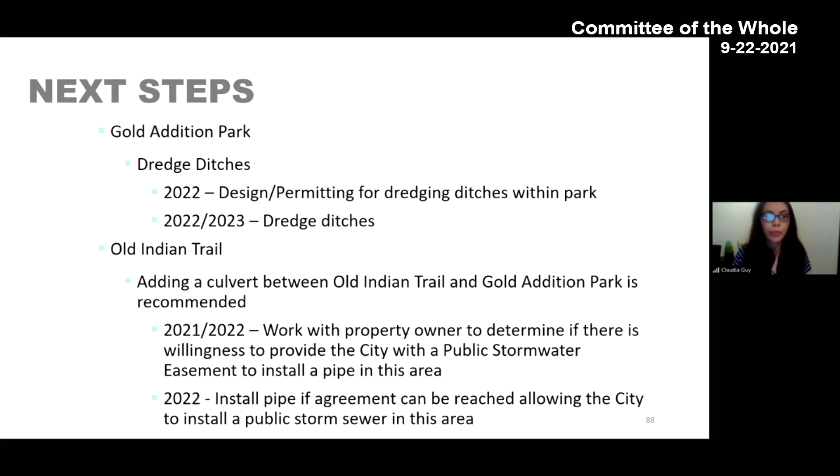At Curry Court, the sump pump collection system, as Anne Marie mentioned, is recommended. However, there's very little buy-in from residents. Therefore, we're not recommending moving forward with that, because if folks aren't tying their sump pumps into this collection system, it's effectively not going to work.

Another idea that came up was redoing the ditch on the south side of Curry Court. In 2021, I'm planning to send another letter to residents to see if this is something they're interested in.

As Anne Marie showed with the profile, we really have a 0.6% slope average, but there are some low-lying areas where the supposedly upstream culvert is actually at a lower elevation than the downstream culvert. We have some areas where ponding will occur because it's not really a straight line the entire way, which is very common when you have grades that are that flat. It's hard to grade a ditch exactly at 0.6%.

You'll see that especially with settling over time. But I do know if we went forward with removing people's driveway culverts and replacing them, at least the driveway culvert piece would be 100% assessed. So that's something we need to see if there's resident buy-in for, or if they're willing to just live with it the way it is currently.

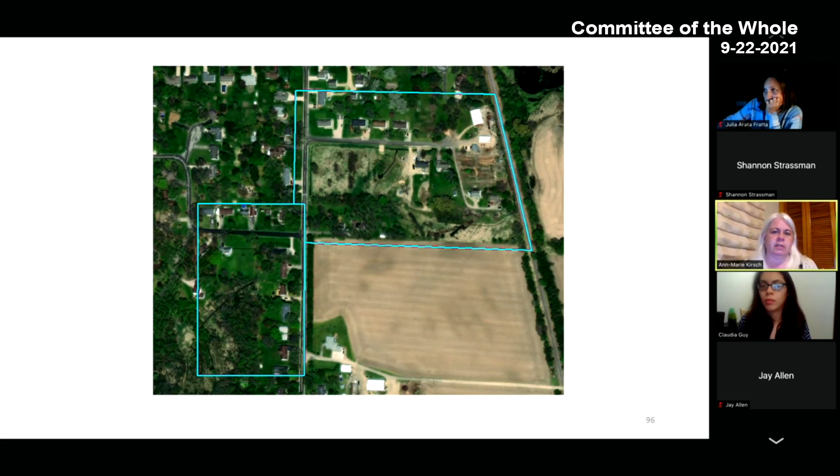So Claudia, if you can go down to the next slide. If you look at the bottom chart for Curry Court, that area again shown in blue, during the max time of flooding under existing conditions would inundate an area of about 7.2 acres.

And the maximum depth at the peak storm time is about 3.35 feet. So now if you go to the Jones alternative, which is on the far right, you've reduced that peak flooding area to about 5.8 acres.

And the reason the depth is showing NA in this case is because this alternative includes lowering some overflow elevation. So when you look at the depths, the elevation goes down, but the depth goes up. I need to pull some more numbers for that.

But when you look at 2 hours after the peak of the storm, under existing conditions there's 4.2 acres inundated, and now there's only 1.09 acres inundated. So you only have about a quarter of the area flooded under this alternative after 2 hours compared to existing conditions. And then 12 hours later, instead of having 7/10 of an acre, you've got about a quarter of an acre flooded, which is about a third of the area under existing conditions.

So that's where we're seeing the improvement—it's encouraging consistent positive drainage, and it's getting the water out more quickly.

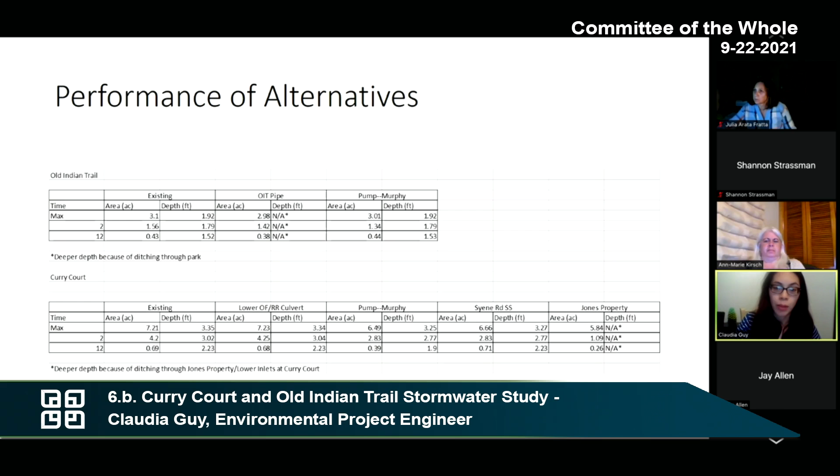Okay, so we're still looking at flooding for a matter of hours, but fewer hours. Right, and it's less area, and it gets out of there more quickly. So that's kind of the bottom line for this: you can expect the flooding depth to be a little bit less, the duration of flooding time will go down by a couple of hours, and that's what the benefit is.

And I was hoping to just open it up and get thoughts from council, your judgment or input on that. There's a lot of information in here, and we know that. There will be a report forthcoming in the next week or two, and we can also make this 90-some slide presentation available to you.

Thank you, and I see Julia raising your hand. Yes, can you remind me again which one is the Jones property alternative? Excuse me, Julia, can we hold off on questions until after the public has had an opportunity to speak, please? Thank you. Yes, that's what I was waiting for.

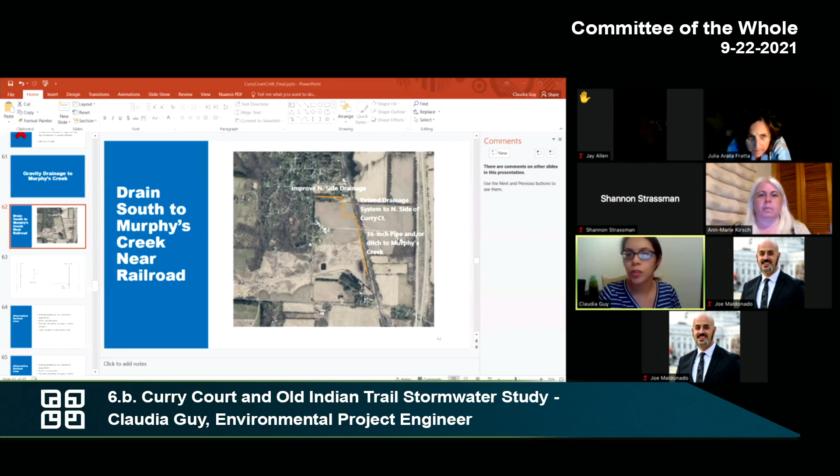So Mark Jones's property is this property over here. And he has expressed willingness in working with the city to get an easement along the far east side of his property to install either a series of ditches and pipes so we could get gravity drainage to the south to Murphy's Creek. Okay, and I'd like to add too, unfortunately the orange line shifted and that first vertical line should go more along the south border. Whoops, it's fine, it's conceptual. May I address Mark's comment earlier too, that this analysis did include going to the north side of Curry Court with yard drains and extending kind of a storm sewer culvert to the north side to pick up that low-lying area.

So when you say north side, can you show us on the map where is that? Sure, improve the north side drainage. So this is actually Curry Court, so the north side of Curry Court. Improving drainage on the north side of Curry Court is what you mean. So basically installing either a ditch and/or culverts, and then tying it back over here.

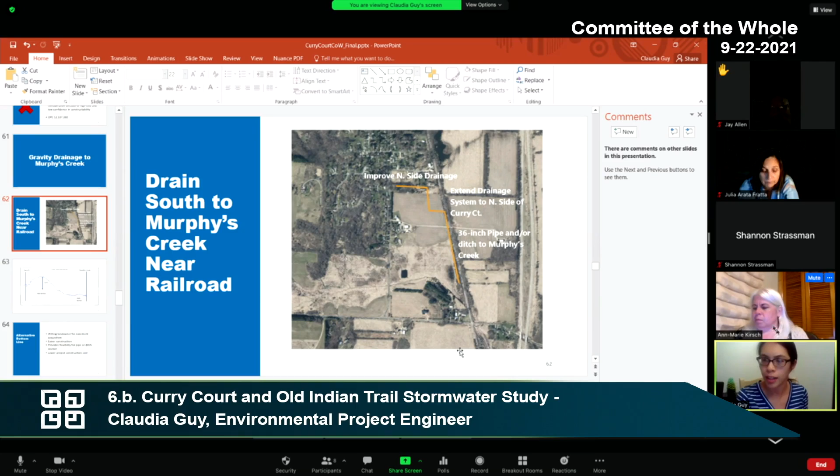Sorry, I'm not sure, I did have some answers that I could provide to the folks who came and testified. I don't know if that's protocol to provide additional information to them at this time. Are these not questions from a previous informational hearing? No, they're folks who testified today. Oh, today, sure. If we move on to Alder Herbst, and then I'll come back to you, Claudia.

Claudia, two things. One, an easement along the Jones property - I would assume we have to be far enough away from the railroad. Has that been taken into account? We can't be in the railroad easement. And second, have you investigated whether we can get a discharge permit into Murphy Creek? It seems like whenever you're moving water from one place to another, you end up with environmental impact statements, and DNR is very touchy about that where there wasn't a natural flow before. So if you could address those two for me, thank you.

Go ahead, Claudia. Marie, maybe I'll hand that to you. Okay, for the first question, we do not anticipate impacting the DOT owned corridor, which is actually owned by the Wisconsin State Railroad Commission. We're still very much in the feasibility study, so we were using parcel data from the state of Wisconsin and Dane County's topographic information. We know that if this were to go forward in final design, things might move 5 or 10 feet one way or another, but that was considered to stay out of the DOT railroad ownership.

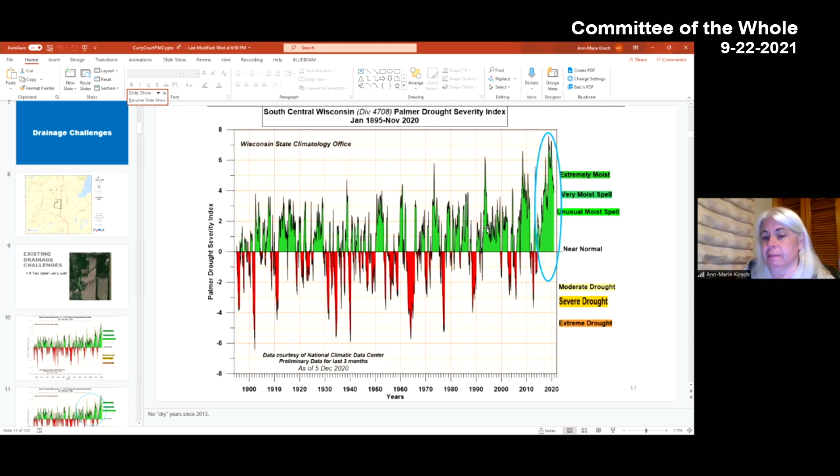So that's one thing. The second thing, the invertebrate study, I was not aware of that, but I would be interested in seeing it if it can be found.

The one thing that's going to be key, and I don't have the numbers in front of me, it's going to take a little more digging, but I think it would be really helpful to know what the relative contribution is for a 10-year storm that would be diverted to Murphy's Creek compared to the natural flow that is there now. I'd need to do a little digging on that.

But it's my understanding, not being a biologist, that a lot of the habitat is really more of a normal flow regime dependent situation. But again, I'd be interested in seeing the study. It's available.

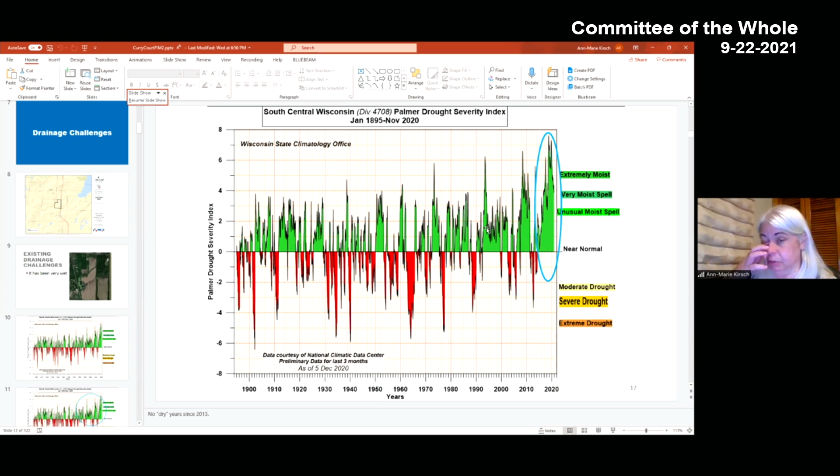And I'll stop sharing. Claudia, were there any other unanswered questions?

Yeah, so I just wanted to answer some questions from the folks who testified. Mark, who's at 5126 Curry Court, mentioned he was concerned that what we were showing did not help his property. I do apologize, we were trying very hard to keep this to an hour.

So that would provide some relief to that property. The pipe across the road would be paid for 100% by the stormwater utility. If additional piping was needed, such as drain tile to actually get the water to the structure, that would be private. So apologies, that was not included, but it was considered.

He said he was unaware of the survey. It was mailed out, it was part of the public information meeting notice for the first hearing. So that's where he should have heard about it.

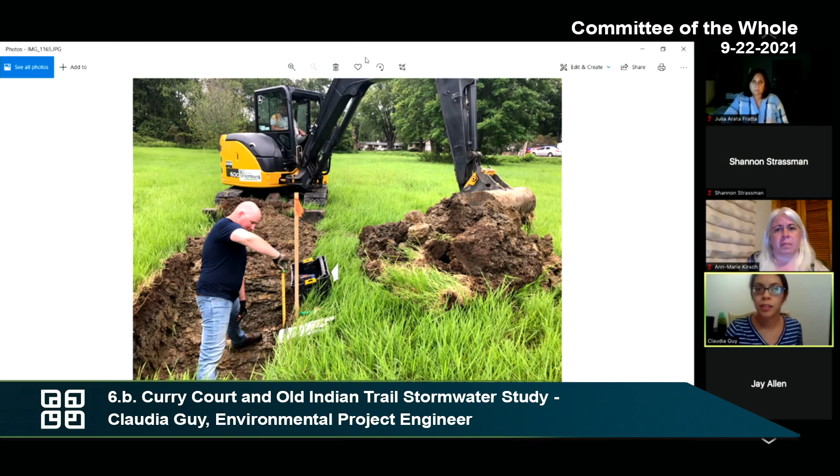Thank you, Claudia. Do I have any additional questions from council? I don't see any hands raised. Anything? Yeah, I want to ask a following question. Alder Arata, go ahead. One of the last residents that spoke, he mentioned about the land transfer. What is that about?

With Mark Jones' proposal? I believe Anne Marie addressed that. Do you want to speak to that again, Anne Marie? We're talking about the Mark Jones property. Yeah, but he mentioned about a land transfer. I don't think we addressed that specifically. I think there's been mention, and this would be more of a city issue, of the idea of swapping some of the land at Curry Park for land he's currently farming, but I don't know if there have been any serious discussions about that. That'd be a question for Claudia and or Bill, I believe.

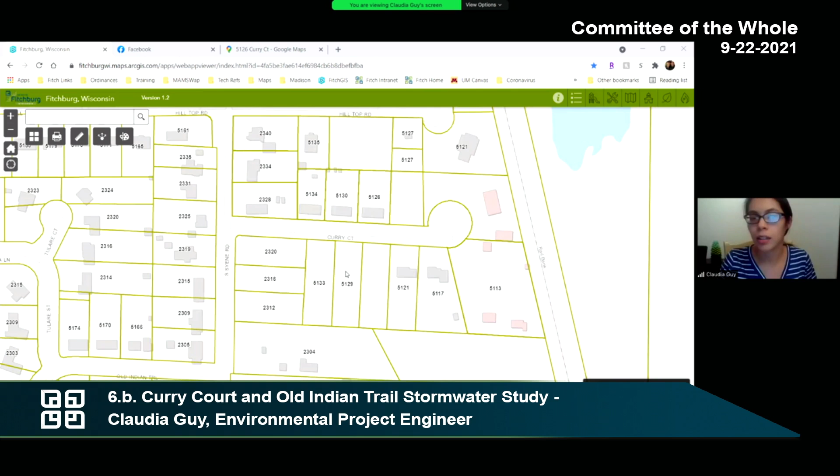I wasn't sure if he was talking about a public easement over Mark Jones's property or land transfer, but one idea that had come up is - let me share my screen again - swapping some land of Curry Park in exchange for getting an easement over Mark Jones's property. What I said to him at the time was, let's get through this feasibility study, because obviously I can't decide whether or not the city is going to do this land transfer, but I think we need to have all of the information in order to make that decision.

If we have this property, we can use it for a pump station or a gravity alternate to the south on South Syene. And if we don't have this property, that limits some of our options. I think at the end of this feasibility study, we have come to the conclusion that the options we were looking at for putting it on Curry Park are not very feasible. So at least in my opinion, some sort of land swap negotiation could make sense.

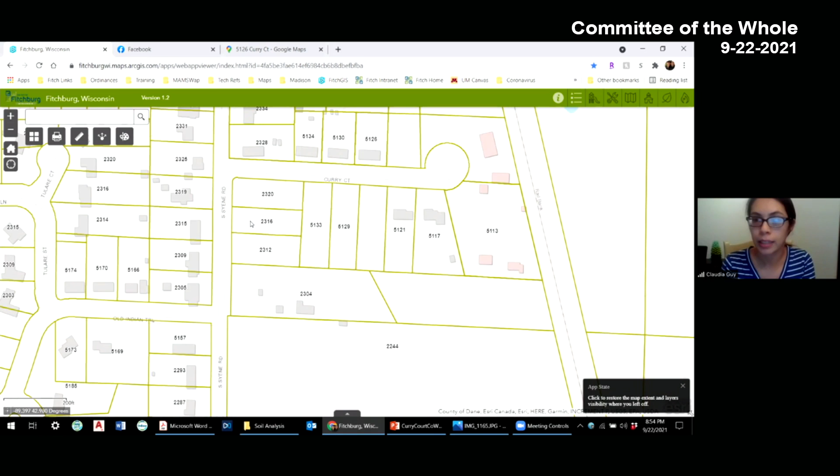Okay, does that answer your question, Julia? Any additional questions? Hearing none, we will move on to the next item.